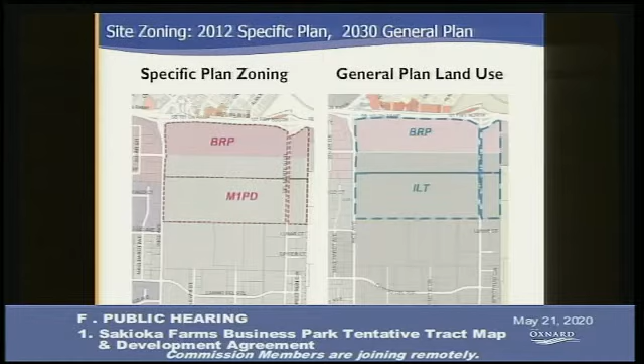So one of the really great ideas for the specific plan that impressed me when I first read it is that it talks about these master plan concepts that really divide all the different layers to the specific plan. I'm going to go through them with you so that when we talk about the project, you can understand how it applies to the specific plan.

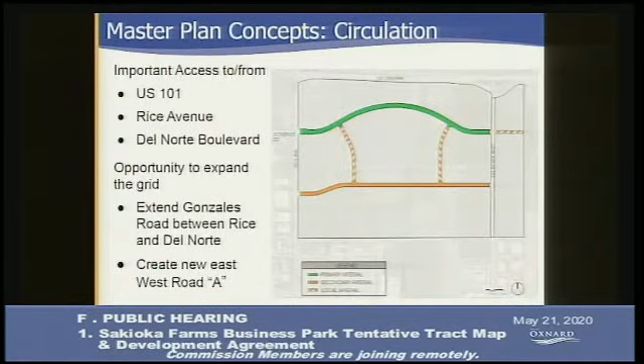And then these two streets that go north and south. Okay, and then an extension - can we go back for a second? Oh, it sort of shows here - there's the extension of Gonzales to the east of Del Norte, which is also important.

That give a certain sense of character as a landscaped element of the city. So even though we are looking at office and industrial and manufacturing, we're also looking at the public experience of this really quite lush and lovely landscaping throughout the site. So there's different kinds of ways that the landscaping has to be applied.

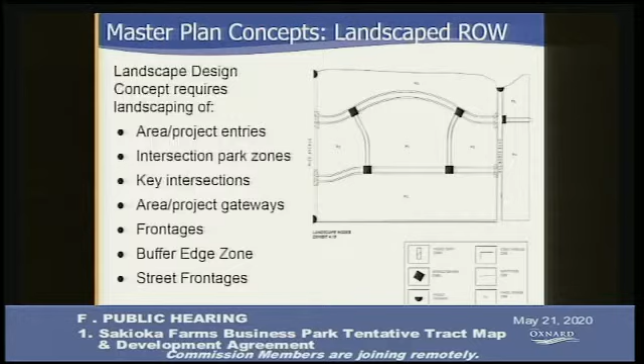Its intent is also to look at walkability. Certainly it'll be beautiful as you're driving through, but there's also going to be a good network of bicycles and sidewalks so that we're looking at multimodal access. The landscaping intends to not only make it attractive for walkability, bicycling, and driving, but also serves as a kind of wayfinding so you'll be able to identify where you are, partly by the landscaping. And it preserves vistas because there are quite extensive setbacks from 30 to 60 feet on the key streets where there are vistas, Rice and Del Norte.

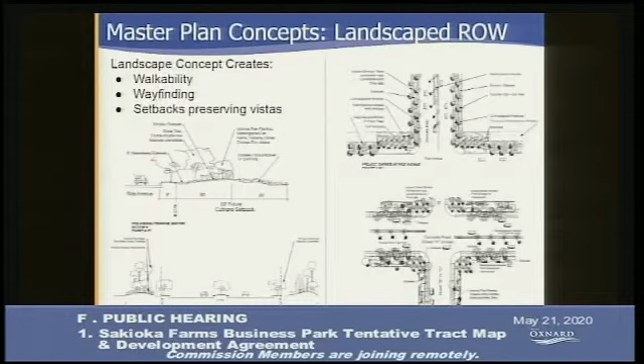Okay, next slide. So now we're going to talk a little bit about the development agreements. I'll go through that and we can have questions afterward, but I'll just go through the main points.

I'm having trouble with your microphone. Is it better if I'm closer or farther? Closer, closer, okay, that's good. Is that better? Much better, okay. All right, Michelle, next slide.

The development agreement is a voluntary contract between a local jurisdiction and a person or entity who owns property in the jurisdiction. It details obligations for both parties, specifies standards and conditions, and provides terms. Some of those terms can be related to financing. In this case, the proposed DA does not modify the physical environment, but just provides certainties and benefits for the potential development projects that will follow.

Next slide. The specific benefits that the city and the developer hope to achieve through the development agreement are the construction of public services and infrastructure, the creation of a community facilities district which is going to provide funding for additional firefighters, economic opportunity and potential job creation from the development that will follow, and conveyance of groundwater rights to the city, and dedicated land for the future development of the Del Norte 101 interchange and the extension of Gonzales Road.

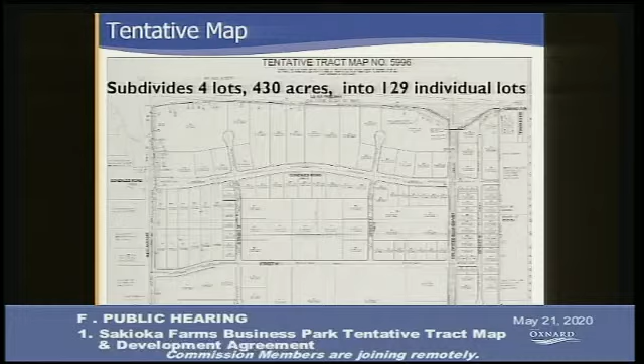One of the key requirements for the tentative map and lot division is that we meet certain lot area, lot frontage, and lot depth minimums. You'll see on Exhibit F that we did the calculations, and the lots all meet the requirements except for one, where there's a condition now to address it that will have to be corrected prior to final map.

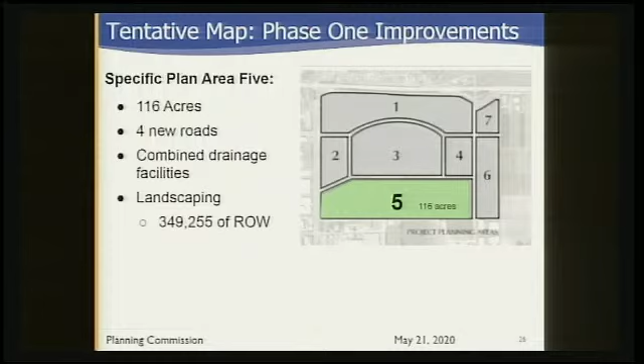So we're talking about specific plan area 5 when we talk about what's going to happen first. This area is 116 acres, with essentially 4 new roads. The drainage facilities are here, and a lot of the landscaping, but not all of it.

Gonzales Road does not get built at this time, but Street A, now named Sakioka Way, does, along with portions of the north-south streets that were anticipated with a temporary cul-de-sac ending.

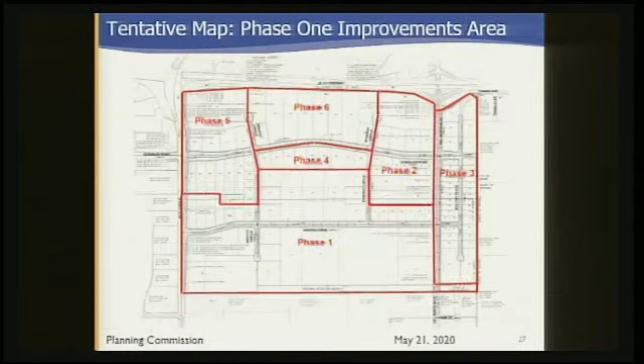Here's a sense of the full street system. What will be built out here is all of Sakioka Drive, part of Gravity Circle, and part of Synergy Circle.

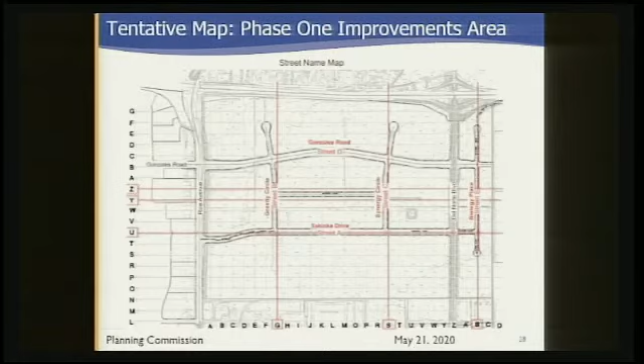This is the phase 1 landscaping, which I think is the easiest way to really look at how it's going to look in phase 1.

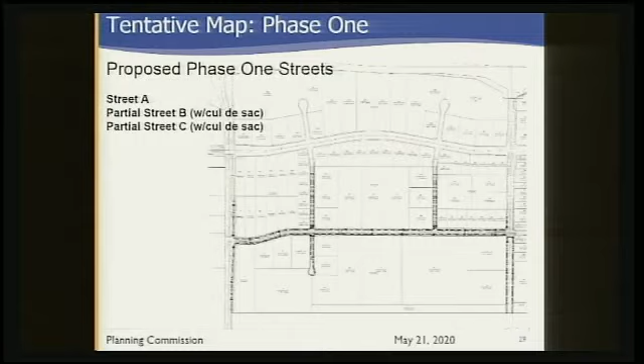One of the key things happening with phase 1, which is very important and takes up a fair bit of the conditions, is that the stormwater drainage area for all of the right-of-way will be built as part of phase 1, along with the second part of the site. It crosses the street, and there's more about that a little bit to the east of Del Norte as well.

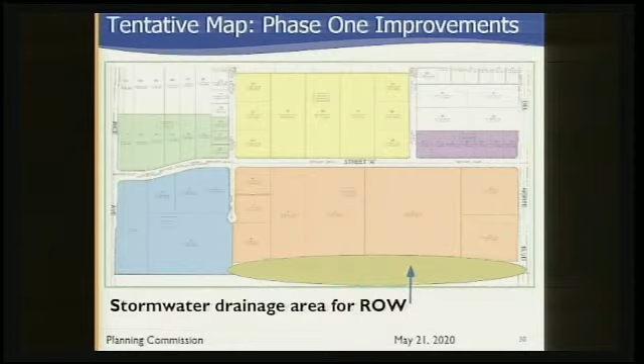This shows a little bit of what goes into applying the specific plan. We're going to be looking at 2 of those intersection nodes, and then we'll be looking at the street frontages and the areas shown here—some of Rice, some of Del Norte, and most of up to the cul-de-sacs on the north-south streets.

We've also been looking at how to update some of the specific plan species that were recommended, and this is taken care of in our conditions, as we recognize that since 2012, the way we think about water, climate change, and what thrives versus what doesn't has changed a little bit. So we're suggesting some substitute species to address that.

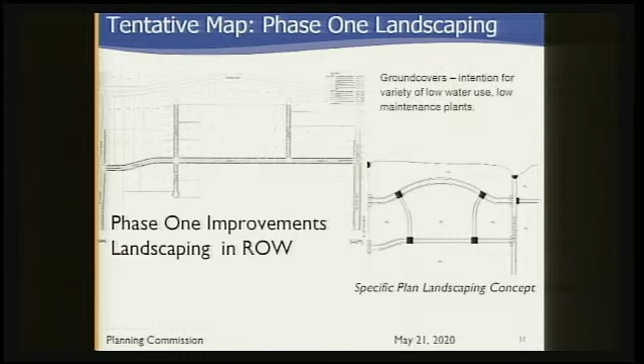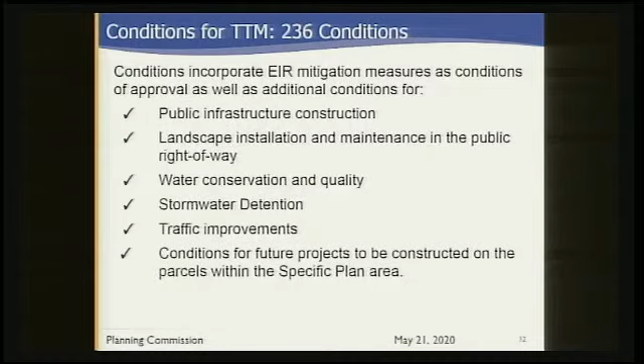There are 236 conditions in the resolution that specifically address a number of things: the construction of public infrastructure, landscape installation and maintenance in the public right-of-way, water conservation and quality, stormwater detention, and the traffic improvements built as part of phase 1. We've also included conditions for future projects to be constructed on parcels within the specific plan area, so our conditions aren't limited just to phase 1—each project that comes through will have its own, more specific conditions beyond the general ones included here.

Some of the detailed conditions that staff spent a lot of time on, working with the CEQA team to get right, include the stormwater detention basins, which are very important, the traffic improvements at key intersections as identified in the mitigation measures, and construction, maintenance, and alternative native and hardier species for landscaping. We were also very proud to include the fiber network master plan—fiber optic cable that was approved around the beginning of May—so there will be optimal fiber optic cable as part of the first phase infrastructure and going forward.

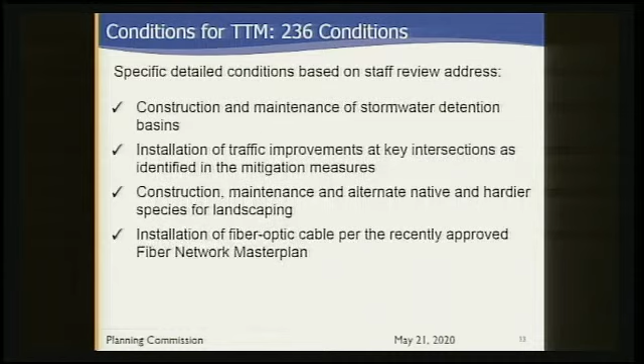So road naming, this was really a wonderful experience for me as someone new to Oxnard, that Oxnard put so much thought into their road naming. There is a city council resolution that identifies what should happen in different areas of the city, and this is the Northeast Industrial Area. That resolution identifies historically significant names as one opportunity, and scientific terms.

So we had a road naming committee that the development team, the CEQA team, submitted terms to. The road naming committee reviewed them in terms of how they might work for emergency dispatch and Spanish applicable translations, made some changes and suggestions, and ended up recommending these names: Sakioka Drive, Gravity Circle, Synergy Circle, Gonzales Road will keep its name as it extends across Del Norte, and Biology Place.

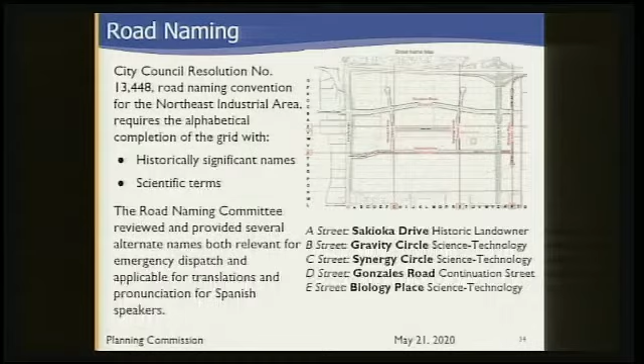Okay, next slide. The next discussion item is the consistency analysis, the CEQA documents. As we noted earlier, the city approved an environmental impact report in 2012, certified it, and adopted adaptive management mitigation monitoring, as well as a statement of overriding considerations for agricultural resources, greenhouse gas emissions, and roadway noise.

The EIR included mitigations for air quality, biological resources, culture and tribal cultural resources, geology and soils, hazards and hazardous materials, population and housing, and public services and transportation. There were less than significant impacts, or no impacts at all, for aesthetics and urban design, hydrology and water quality, land use and planning, mineral resources, and population, education and housing.

Next slide, please. So per the CEQA guidelines, section 15168C, we have the opportunity to look at this program EIR that was adopted in 2012 and determine whether or not an additional environmental document must be prepared. The city used the consistency evaluation format allowed under the CEQA guidelines to look at that, to do any additional work needed, or to verify that everything stated in that 2012 EIR is still addressed per the current conditions, and that they haven't changed significantly.

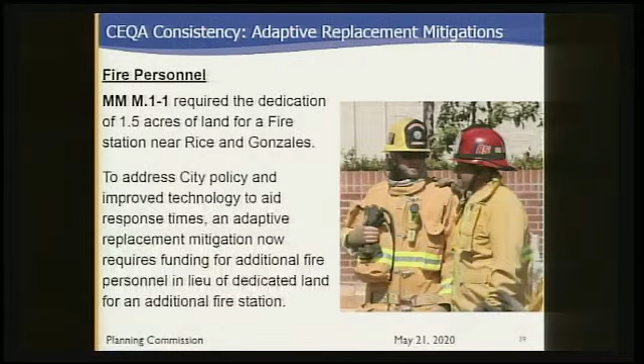There's two areas where the city has made significant progress in terms of their sustainability and policy, where we've taken the existing mitigations and replaced them with adaptive mitigations that have equal or better overall focus on what the impacts would be. One is fire personnel, which I discussed earlier. It's part of the DA, but it's also here in the mitigation measures, so instead of dedicating land, the DA covers funding for 3 firefighters for their personnel, their pay, and also some increment of increase in benefits, and that's in perpetuity — I think it's very important to emphasize.

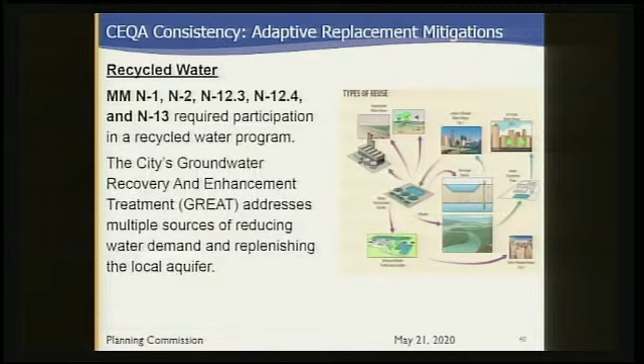Thank you. The other part is about recycled water and the way the city has progressed in terms of groundwater recovery and enhancement. The city now has their GREAT program, which is broader than what was originally anticipated in 2012, which required a lot of recycled water pipe. Next slide, please. The way we've adapted those mitigations is to better align with the GREAT program, which has more opportunities for addressing water usage with water rights, which is city water, and participating in the replenishment of the aquifer.

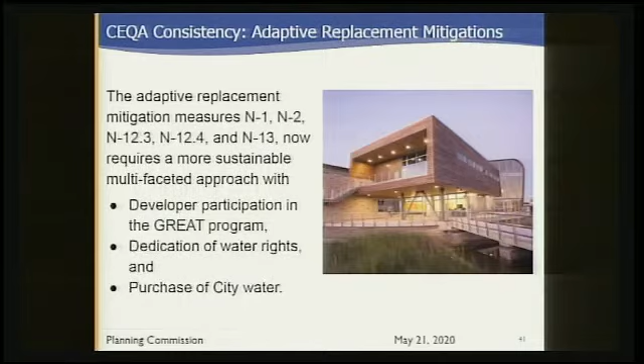Well, thank you very much. I am so glad to have seen this presentation because it answered a lot of the questions I had after reading every single page in this packet. So I really appreciate that, especially the distinction between project and development. I think that's good to explain to those of us who aren't in your field. So thank you very much.

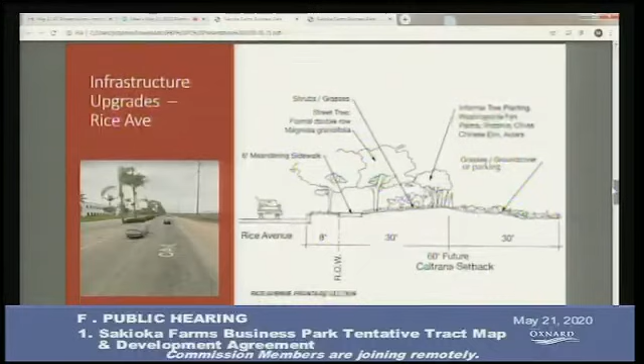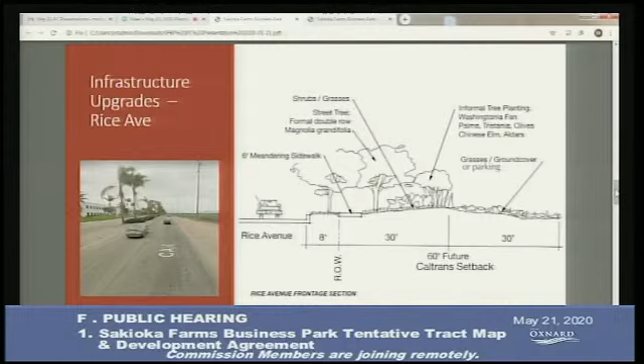Next slide, please. Some of the other infrastructure benefits - this is along Rice Avenue. Currently there's 2 lanes that travel north towards the freeway. We'll be providing a 3rd lane throughout the entire area, and then a 4th lane at the intersections. Maybe more important than that, there's going to be 68 feet of landscaping. That's what's depicted on the section to the right. You can see there's parkway, sidewalk, and then a significant amount of landscaping that will be along the entire frontage of the property.

If we can go to the next slide, please - the next slide is Del Norte. I'm sorry, this one's Rice. This is actually Del Norte Boulevard. On this side, in addition to the existing landscaped median, we'll be providing 38 feet on either side of Del Norte with landscaping and sidewalks in both directions. And hopefully not too many palm trees. If we can go to the next slide.

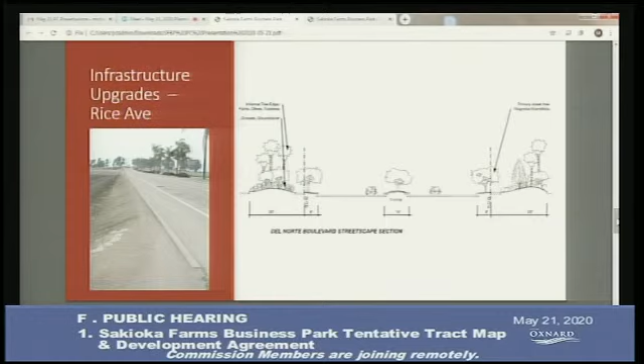So in terms of the business park features within the project, one key feature, highlighted with the oval to the right, is the Gonzales extension. We will be building the Gonzales Road extension to the eastern boundary of our project, with the intent of that connecting all the way into Camarillo in the future. The red circles indicate areas of enhanced landscaping, talked about in the staff report that Sarah gave, at key intersections and also with some project gateways that will be provided for the project. In addition, throughout the project we have extensive landscaping along all of the streetscapes, and we are also providing bike lanes on all of our internal public streets for circulation.